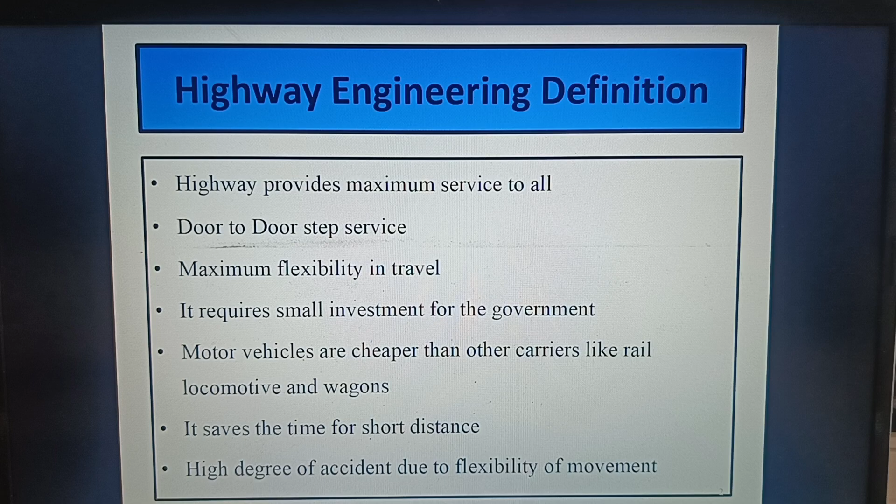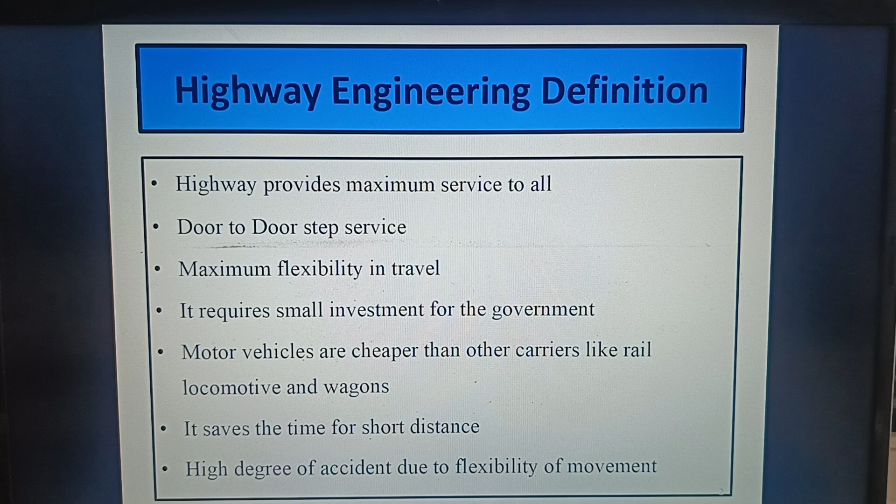It requires small investments for the government. Motor vehicles are cheaper than other carriers like rail locomotives and wagons. It saves time for shorter distances. There is a high degree of accidents due to flexibility of movement. So this is the only disadvantage in highway engineering. The chance of accidents is high when the vehicle rate increases. So this is the real definition for highway engineering.

Next, we talk about the significance of highway planning. To provide a safe, efficient, economic, comfortable, and speedy movement for people and goods. So, this is the primary significance for highway planning. Second, to plan for expected future development and social needs, to fix phase-wise priorities for the development of each road link based on utility.

And the third one is to optimize the usage of roads with the available resources from nearby locations while doing the construction projects. This is quite convenient while we are providing plain roads, but in hill stations, if the required material is not available, it will be a tedious process and we need huge investment.

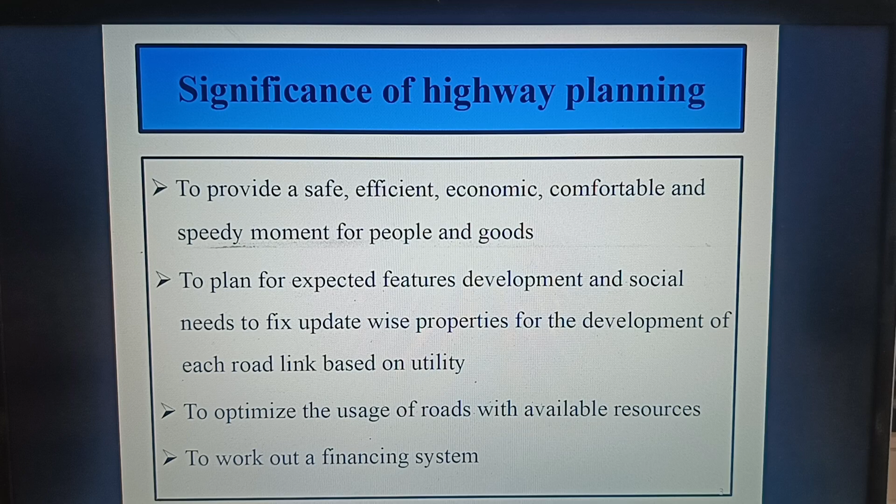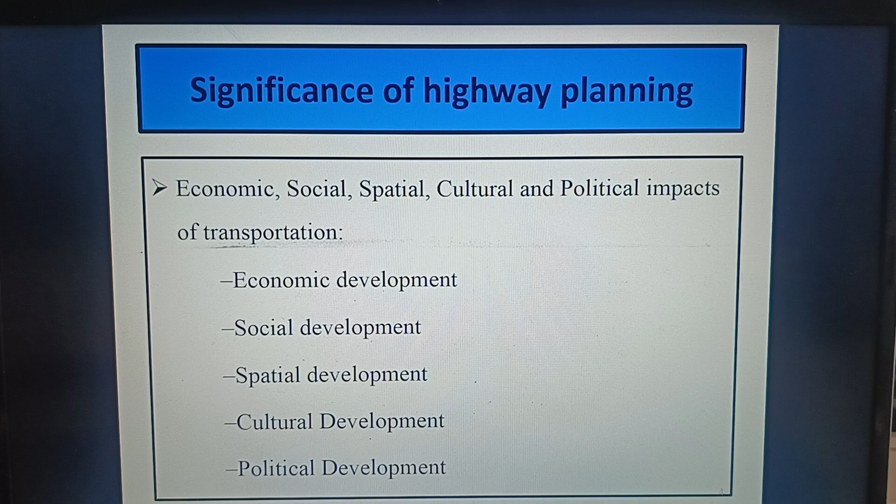To work out a financing system is the last one. Yes, of course, it involves large investments, so we need to find the best alignment carefully. Then, social, economic, spatial, cultural, and political impacts of transportation. So, first economic development, social development, spatial development, cultural, and political development.

Modal limitations to sustainable development. Sustainable development is the development which meets the needs of the present without compromising the ability of future generations to meet their own needs. And modal share is nothing but the percentage of total passengers or freight moved by a particular type of transportation.

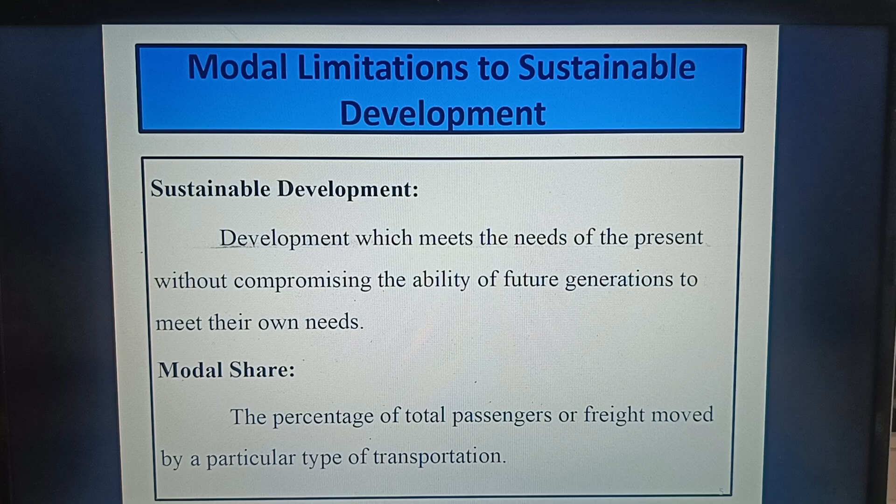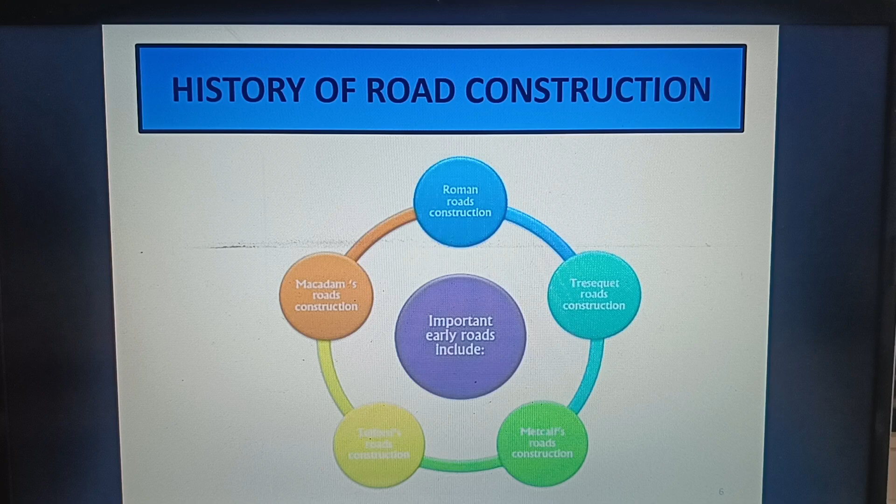The next one is about the history of road construction in India. So, during various periods, many empires have developed road construction in various methods. First, Roman road construction, Tresaguet road construction, Metcalf road construction, Macadam road construction, and Telford road construction methods. So, first one, Roman roads.

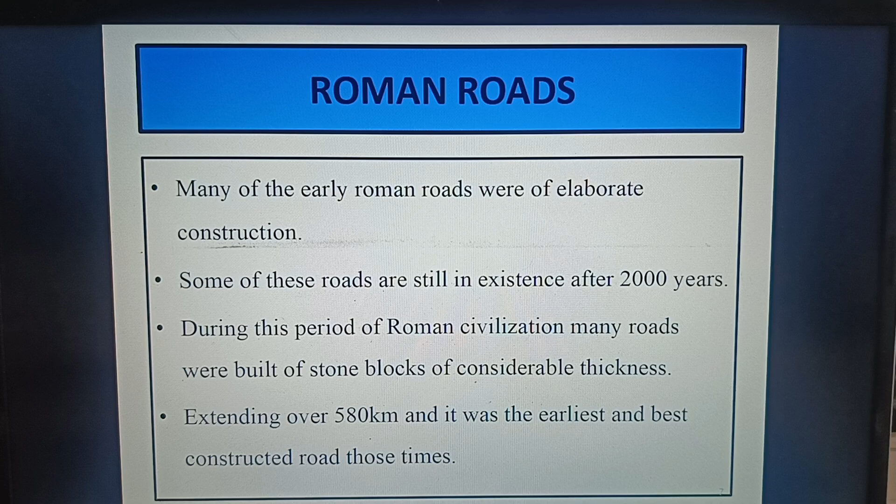Many of the early Roman roads were of elaborate construction. Some of these roads are still in existence even after 2000 years. During the period of Roman civilization, many roads were built of stone blocks of considerable thickness. One extends over 580 km and was the earliest and best constructed road of those times. They were built straight without any gradient. The soft soil from the top was removed till the hard stratum was reached. The total thickness of the construction was as high as 0.75 meter to 1.2 meter.

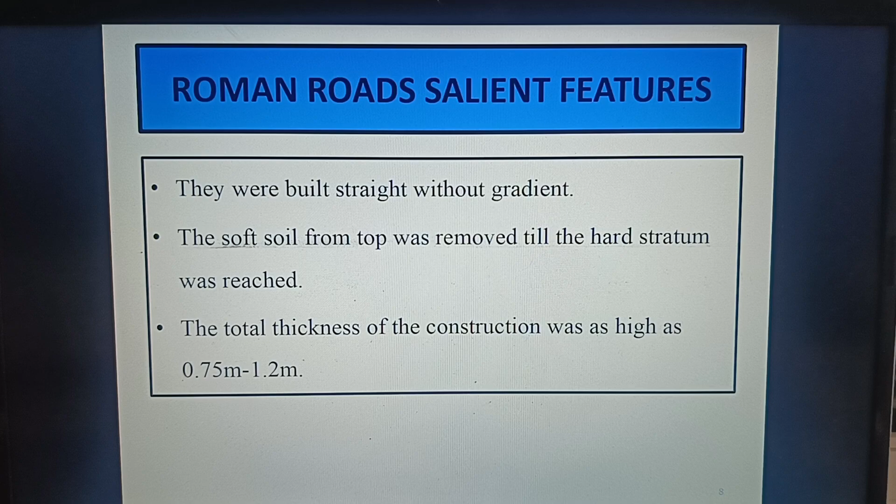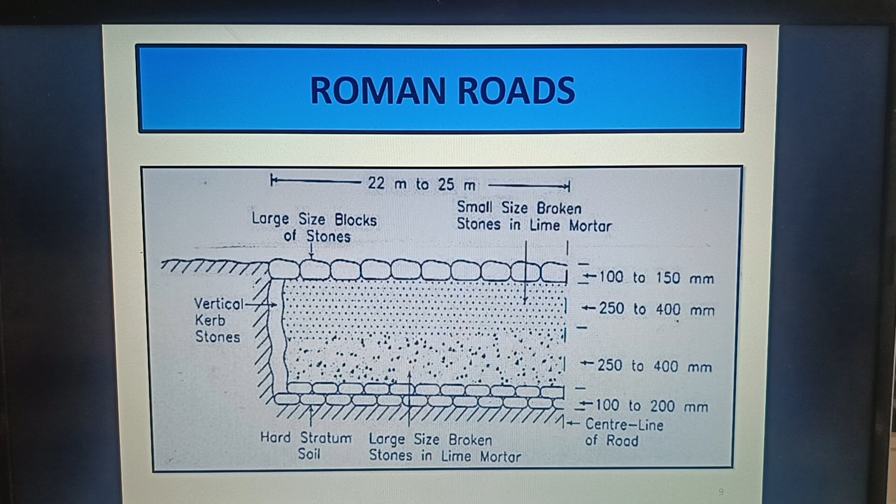So this is the extended projection for Roman road construction procedure. So first, soft soil has to be removed until the hard stratum is reached, for the carriageway length. The bottom of the road was covered by 1 to 2 layers of large foundation stones laid in lime mortar, having a total thickness of about 100 to 200.

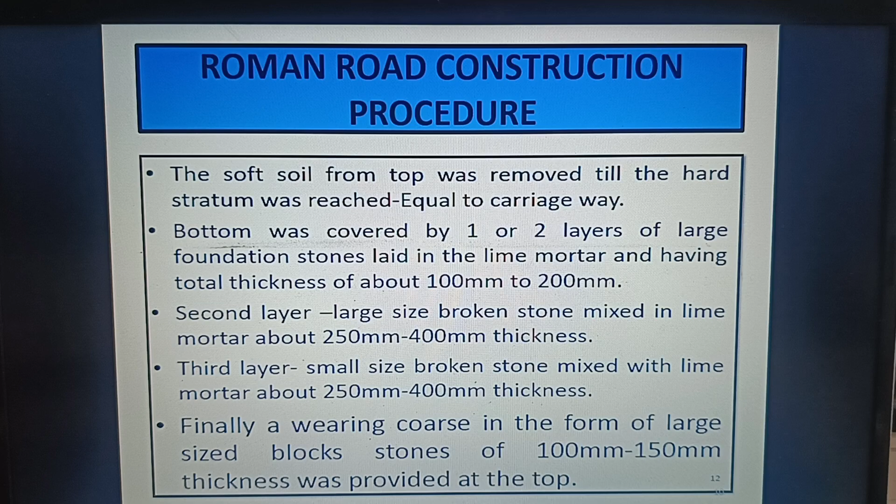And the second layer is large size broken stone mixed in lime mortar, about 250 to 400 thickness. The third layer is small sized broken stones mixed with lime mortar, about 250 to 400 thickness. Finally, a wearing course in the form of large sized block stones of 100 to 150 thickness should be provided at the top of the pavement.

The second method is Tresaguet construction. A French engineer, Pierre Tresaguet, developed an improved method of road construction in France in 1764. The total thickness of the road construction should be only 300, and thus he laid the foundation for modern road construction techniques. He also emphasized due consideration of subgrade moisture condition and provision of camber at the top to drain off the surface water.

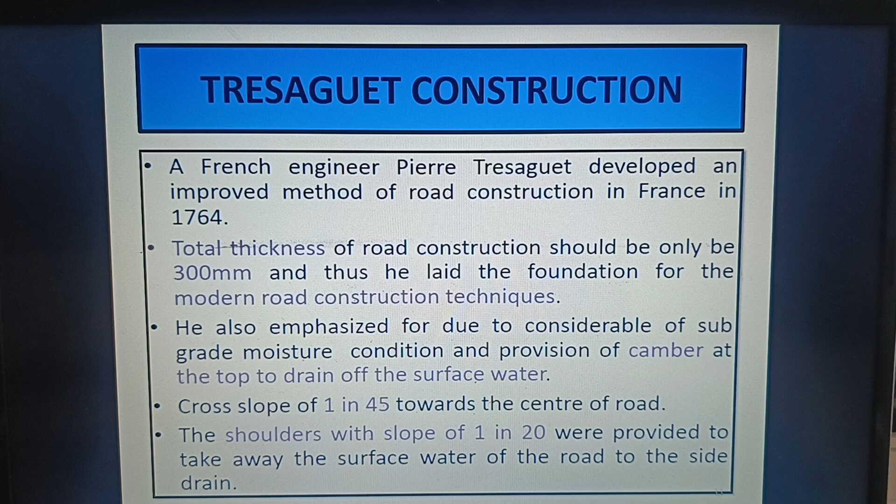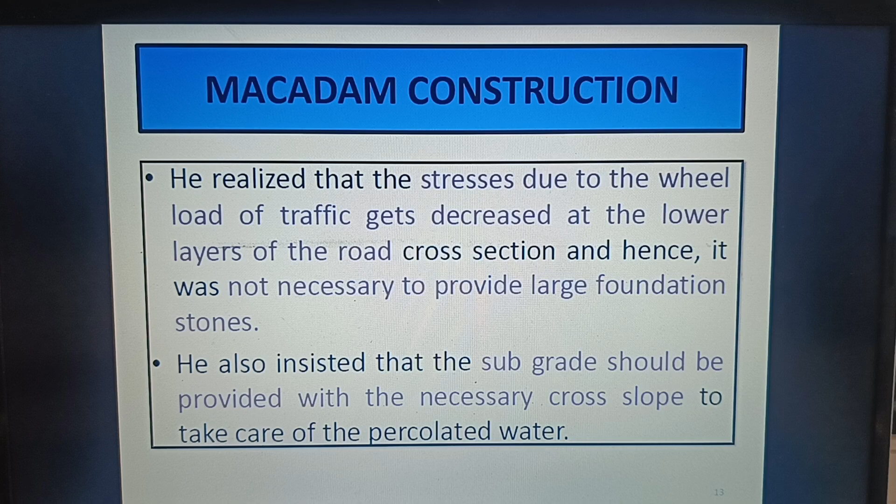Next method is the Macadam method of road construction. Macadam realized that the stresses due to wheel load of traffic get decreased at the lower layers of the road cross section, and hence it was not necessary to provide large foundation stones. He also insisted that the subgrade should be provided with the necessary cross slope to take care of the percolated water. So he is considered as the father of road construction. So there are two layers, each having a thickness of 100, of broken stones of size 75 maximum.

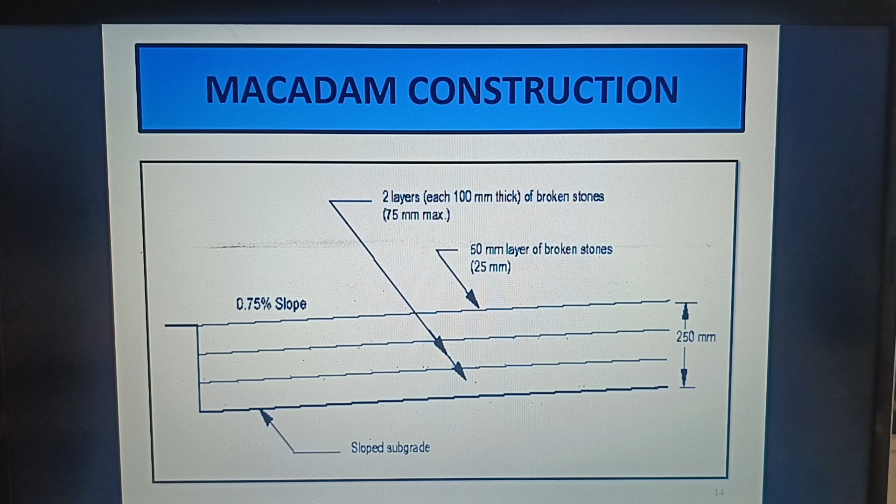And as I said earlier, the percentage of slope in Macadam construction is 0.75%. So the subgrade of a desired road width of 9 meter was prepared with a cross slope of 1 in 36. The first layer of 100 thickness of broken stones of strong variety, passing through 50 size, was laid and compacted. The second layer of 100 thickness of broken stones of strong variety, passing through 37.5 size sieve, was laid and compacted.

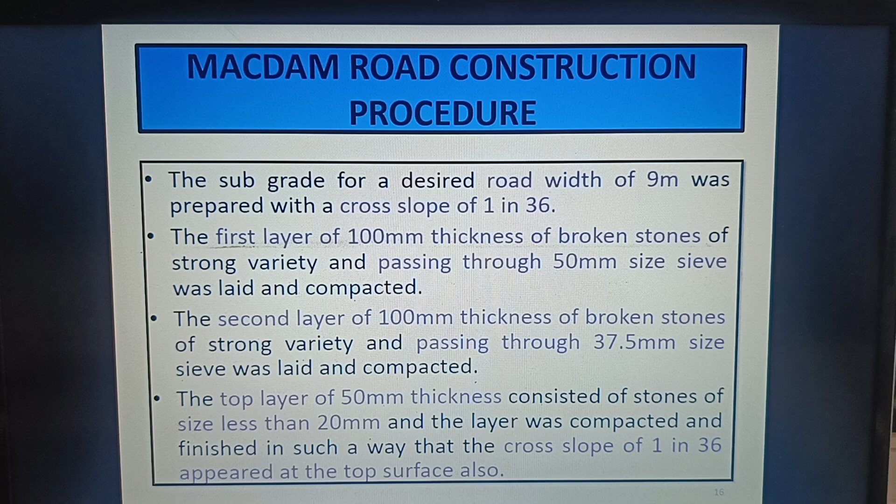Second one, foundation stones. In Telford's construction, large sized stones of size 220 at center and 170 at edge were provided. But in Macadam's method of construction, a uniform 50 size bottom layer of 100 thickness was provided. Regarding base course, in Telford's construction method, 2 layers of broken stones of total compacted depth of 150 were provided, but in Macadam's method of construction, 1 layer of broken stones of depth 100 was provided.

Surface course: 40 mm thickness with a cross slope of 1 in 45 in Telford's construction, and in Macadam's construction 50 mm thickness with a cross slope of 1 in 36 was provided. So finally, the thickness of the cross section varied from 410 to 350 mm at edge, but in Macadam's it is uniformly 250 mm.